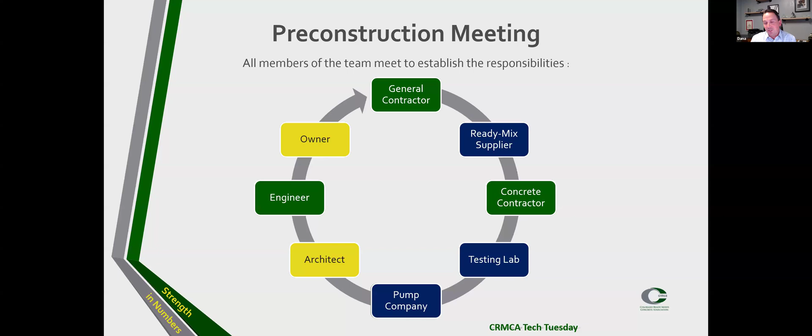So at the end of the day, are pre-construction meetings really all that important? Well, yeah, I think they establish clear communication. It's easy to say we communicate, but not understand whether those in the room or other people actually communicate. So if you don't sit down and have a dialogue, things get missed.

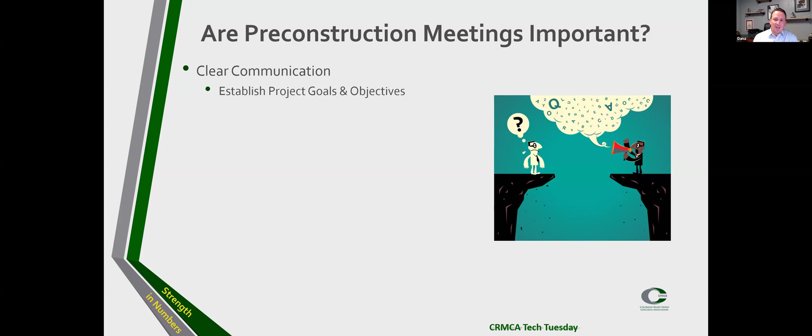You say things, you talk about things, and you've just assumed other people are on the same page as you. When you sit in a room like this, you do a better job of getting your goals out, making sure everyone knows what the objectives are, so everybody's in lockstep. And of course, being proactive in your planning is helpful at pre-construction.

If you're not proactive, you end up being reactive and doing triage. At the end of the day, nobody wants to be in triage mode, but over the years, far more often that's what happens when you don't have these meetings, when everyone doesn't get to the table and talk about what's going on and what's involved.

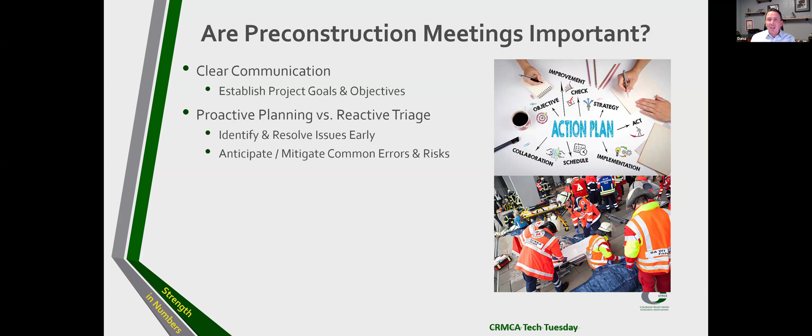And you end up in these triage moments where things are falling apart. It's not going the way it's supposed to go, and usually you have a bad pour or something bad going on. Then what do we end up doing? Everyone gets into the room to discuss what went wrong and why, when all of that could have been resolved had we done it early. We could have talked about what was going on, potential issues, and all that stuff. Shared experience is also a component of that.

Clarity in the chain of command is also important as a piece of this. Who has what roles, who has what responsibilities, is really important. Who rejects the truck, who makes decisions for adding water into a mix, who decides whether something has to move, or understands what things could be in the way of efficiently getting a pour done. All those kinds of things are really important.

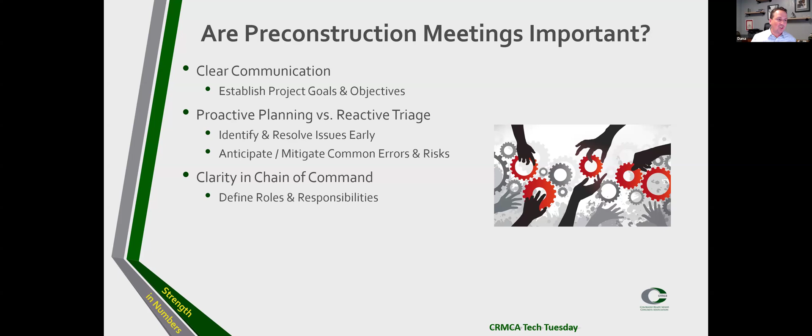When you wait until the day of the pour and people don't know who's in charge, obviously we all know what that creates. And then timelines, something as simple as that. Let's avoid the surprises and the delays. Let's make sure we're as efficient as possible in everything we do, because when you're efficient, you're far more profitable when everyone's efficient on the job site. And costs are always an issue for any job.

So we also foster collaboration and teamwork. That's really important. Anytime you get people to the table and have time to talk to each other, the side effect is collaboration and teamwork. It's just so much better when people come and sit around the table with each other.

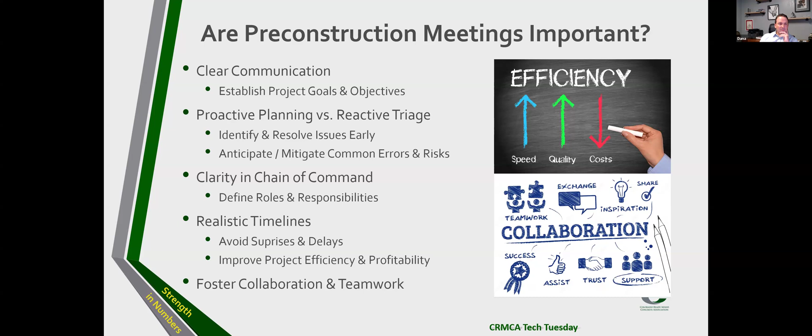So what are some agenda items? I kind of broke these up into categories of stuff that needs to be discussed. Agenda items at a pre-construction meeting would obviously include basic project information and schedule. That may not seem like a big deal, but really understanding a schedule from a ready-mix supplier standpoint or concrete contractor standpoint is really important.

The more you understand about where that schedule falls—you'd think that's naturally communicated, but it isn't. On the ready-mix side, it's far more often that you don't know the schedule than that you do, of when things get poured and what's going on. So having that information is important for how you plan and what other projects you take on.

Obviously, what kind of materials are you using, and what are the mixes? What does the pour schedule look like, and what does sequencing look like? Understanding that helps you see how weather days impact the overall schedule, if you sit down and have a discussion around pour scheduling and sequencing.

Site access is really an important discussion too—where do you come in, where do you leave, are there rules around that? Do we have limitations due to noise ordinances and things of that nature? All of that needs to come out and be discussed. How does that affect things?

Where's the concrete washout going to be? Is it sized properly? Does the location make sense? I've been on projects where we put the concrete washout in a location with only one-way street access in and out. So now you have one of the busiest places on a concrete pour—the washout, since every truck's got to come in and out of there—with a one-way road getting in and out of that location, which can really create bottlenecking and affect the pour in a whole different way.

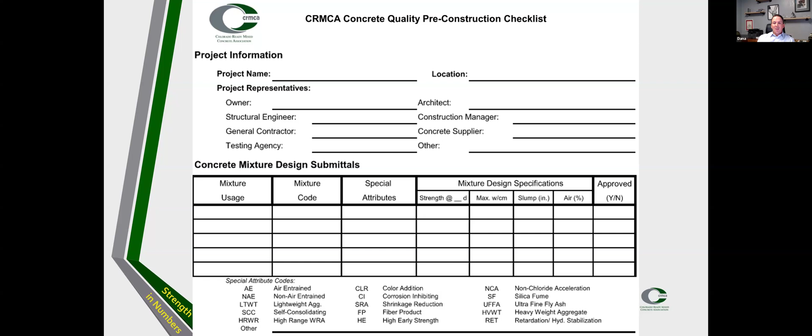If you go through this, you're going to minimize a lot of potential issues from a testing and compliance standpoint on the ready mix side of things. Obviously, the first page is very simple, just names the stakeholders and anything that's going on with any of the mixes that are in here. And then this is really important - if you don't do this on your job, I strongly encourage it, is do you ask, right?

Are you, the testing agency, giving me a technician that's certified? This is important. It doesn't mean someone can't get the test right, but it doesn't guarantee that they know how to do the test right either. So one doesn't behoove the other. But if I know the person's certified, then I at least have an understanding that that person should have the requisite skills to perform the test they're required to do. That's the same thing for all of us.

You wouldn't have someone placing concrete who didn't have knowledge of how to place it. So we need to make sure the person administering the tests understands what they're supposed to do. Unfortunately, in our industry, the concrete technician is often the lowest guy on the totem pole at the testing agency - usually their newest people, kind of a starter position. It's a crazy anomaly in our industry that this person testing probably one of the most expensive products on the entire job is typically one of the newest people in the industry working at the agency. So asking this question is really important.

And then, do we have access to all the things we need? Is the site - does the contractor have the ability for the testing agency to come back and pick up their cylinders? We see this far too often. Those cylinders have to be picked up within the first 48 hours. So when you have a pour on a Friday morning or afternoon, they can't be picked up till Saturday. But is the job site closed? Can they even come get those cylinders, or do they have to wait till Monday? If you have to wait till Monday, you've already made those cylinders invalid.

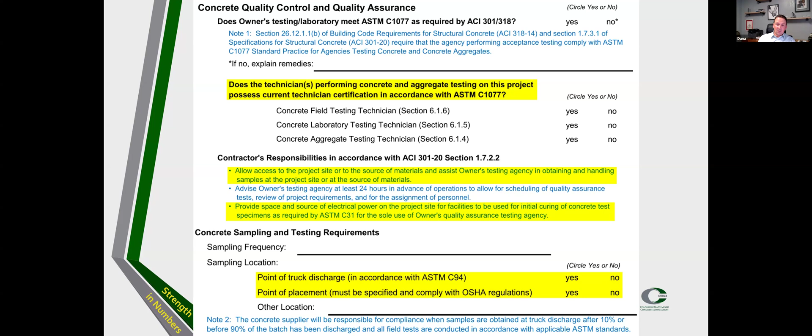It's not just, hey, if you flat stick out the boom it doesn't have any issues, or if it's an A-frame - I've heard all sorts of things over the years. The truth is there are a lot of factors that play into how the mix is affected inside the boom.

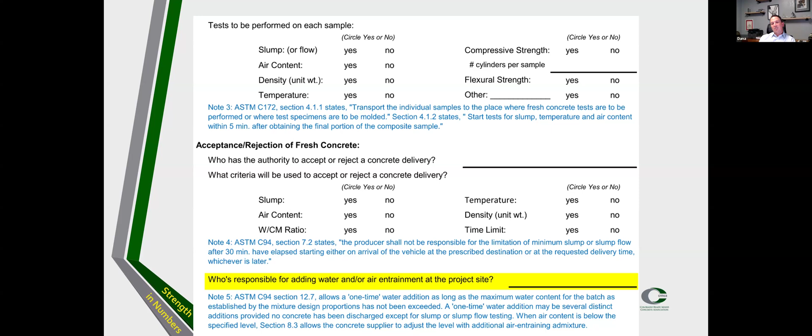There's lots of other things on here that clearly need to get discussed, but I'm going to point out some of the really critical things to me that this pre-construction checklist talks to. Are we getting a proper field test as part of this? That's really important. Remember, at the end of the day, you're looking for a third party, impartial person to test the concrete.

So that's what has to happen, and we want to make sure it happens right. So what does a good test look like? Well, from the basic standpoint, they've got to fill that slump cone in 3 separate lifts, making sure there's no voids.

One of the things I see all the time is that when you go to that slump cone, it comes at an angle like this. When you're rodding into that slump cone, the propensity is to rod out really easy, but not to rod backwards towards you, because you have to move your hands in a forward motion to get that rodding on the backside of the cone to stop there from being a void on the backside. And so when that happens, you get a shearing effect or a displaced center when the slump cone is pulled. Making sure the person understands that and is rodding it properly.

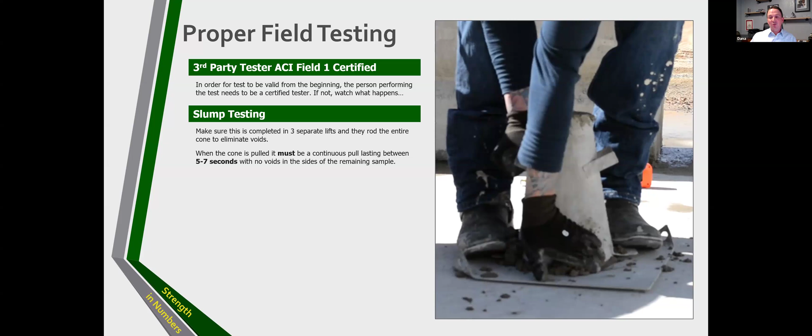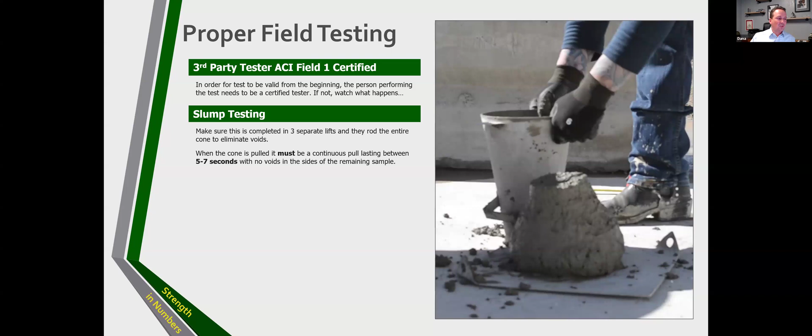And then do you get a good 5 to 7 second lift when he pulls the cone? Is there no break in the cone? Is it 1,000, 2, 1,000, 3, 1,000, 4, 1,000, 5, 1,000? A proper slump pull, to make sure that you have an accurate test coming out of there.

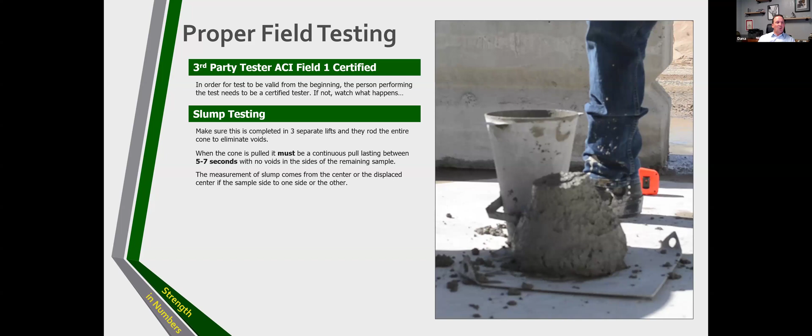And then obviously you measure from the displaced center - that sunken in little section right down in there, not off the edges. And if that whole thing shears, if it slides off or cuts, then it's a retest. You can't find the new displaced center. You have to scrap it and start over again and get a proper test.

And so if you see someone with giant globs of stuff on it, the test may not be as good as you hope. But again, just understanding what that looks like - are we making sure they've weighed their pot before they take their reading so they know how much they've got, because you have to subtract the pot from the weight. And then we're making sure the lid seals properly, with no air loss - that gauge shouldn't be moving right before you hit the release button on the side.

So do we see a stable gauge reading at the end of it, or is it still drifting? All that stuff indicates there's an improper seal around the bottom and that test needs to be rerun.

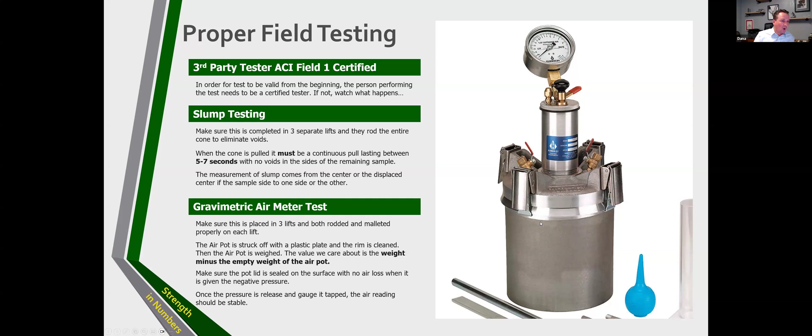And then all of that's to be said, at the end of the day guys, whatever the air test says should coincide with the unit weights as well. These are just some general rule air unit weight densities, but this is also affected by whether you have any pozzolans in your mix, or whether it's straight cement. So these numbers go up and down, but there are some general rules - these are kind of some of where you see air fall as far as unit weight.

The more air something has, the lighter it is in weight. So if someone tells you you're low on air, you've got 3% air in your concrete right now, and you ask what's the unit weight, and they say 33 pounds, they've lost their mind. Something's wrong in the pot or in the test that needs to be done, and we need to look at that. There needs to be a correlation between those two, and it becomes really important.

Understand, guys, air entrainment is the pink unicorn of the concrete industry. It's really hard to entrain air. There's lots of things that affect it. So have these dialogues in your pre-construction meeting about what happens on a day where we're struggling to get air right, because it's not about if it's going to happen, it's about when it's going to happen. Air is complicated, it's not simple, and there's all sorts of things that affect it.

Understand too, are we having a dialogue about our field test? Do we have a 90-minute rule, or are we really looking at the new ASTMs that say there is no 90-minute rule as long as you've had a discussion up front and you're using hydration stabilizer and things to extend your time. Have you had that discussion before you're in a situation where you're having to throw away trucks that may not have an issue?

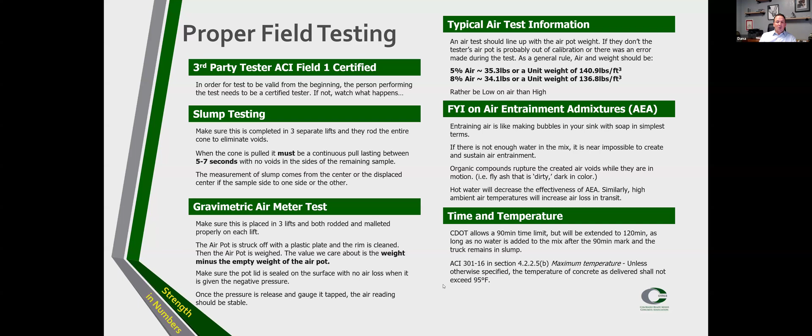So having these kinds of dialogues up front so that everybody's on the same page is really important. And then knowing what your max temp spec is and where that sits in time.

With that said, one of the great things that exists out here - and we're very blessed again in Colorado and CRMCA - is that CTAC was created. What is CTAC? Well, it's the Concrete Testing and Adherence Collaboration. This started a long time ago. I was very blessed to be a part of this when we initially had dialogues about the beginning development of it. But what is this really?

It's designed to help make sure that we have good, fair testing of the ready mix products that are going down, on both sides of the spectrum. It's meant to get all tides to rise. It's no different than when...

Your person comes in and they install rebar, and they get the rebar installation done - what happens? Well, the concrete contractor comes in and checks the rebar and validates it, right? And then behind them comes the inspector, they come in and check the rebar too. And if the general contractor's on top of their game, they're going to check that rebar too, just to make sure everyone's got a double check.

Well, it's the same kind of concept here. CTAC is developed so that there's an opportunity to make sure that the testing is going on, is being done correctly, and is being done according to the standards, so that we can rely on the results that come from it. Because if the testing is done inappropriately, then we don't know whether the test results are good or bad. So it's better to see this up front and know we potentially have an issue than to get to the back end and be in triage - everyone scrambling, trying to figure out why the test failed and why nothing is going the way we wanted it to.

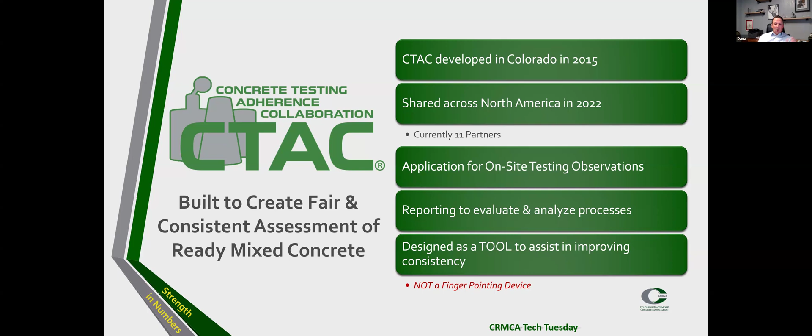It's been a giant hole that needed to be fixed. What it is, there's an application that allows anybody who's on site—the contractor, or anyone who's an observer who understands how the test is run properly—to observe and put down their observations of the test. Is it being run according to the protocols? And then that's allowed to be evaluated afterwards.

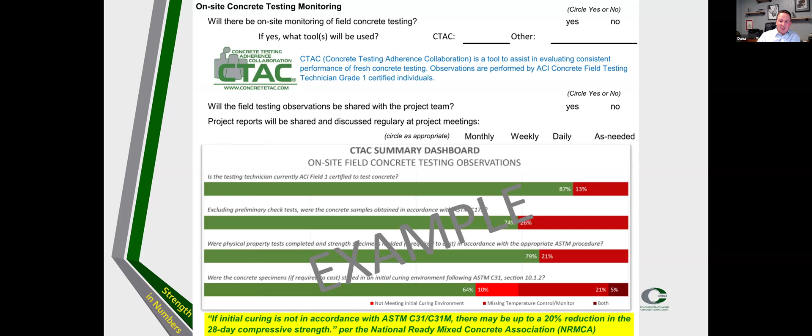With that said, I'll tell you now, NRMCA says there may be up to a 20% reduction in compressive strength if curing is not done appropriately. I'm going to show you some data from testing done by a whole lot of people in the CRMCA—technicians, testing companies, ready mix suppliers, and contractors—in a test fest. And I believe those numbers by the NRMCA are pretty conservative in reality. So what is the requirement?

The requirements are that after molding, immediately they have to be stored in a 60 to 80 degree environment, preventing moisture loss. Both of those things are critically important. Cylinders have to be held at 60 to 80 degrees, and moisture loss is just as important. Often it's not thought of as such, and we'll talk about that more as we go.

And then understand, when you have 6,000 PSI and greater, that window gets even smaller. So now from 60 to 80, you're down to 68 to 78. You've really got to control the temperature on high strength mixes to make sure they're done right.

And then how are they transported afterwards? That's just as important, right? You can't transport them until at least 8 hours after final set. Any earlier than that, and you fear creating fractures in the cylinders that will give you false positives or false negatives on the test.

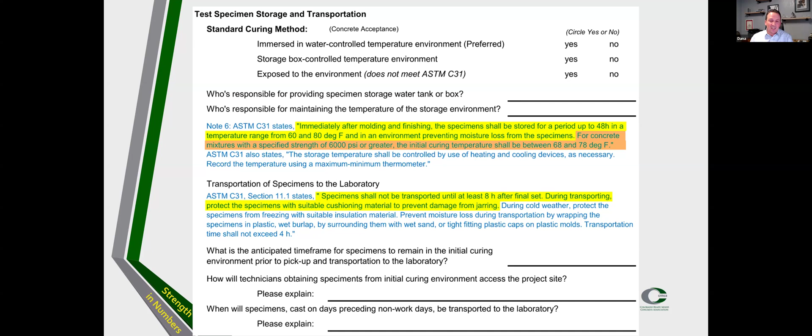I've seen this a lot of times—I walked onto a job site once and the guy was grabbing all his cylinders and throwing them across an 8-foot void where the foundation was, because he didn't want to carry them to the other side. He was throwing the cylinders like 9 feet across this chasm. I don't think that's what they were designed to do, and there's a good chance those cylinders get compromised. So it's important that we have these dialogues up front about what the expectation is and how the cylinders get treated along the way.

So what does proper field testing look like? Here's exactly what we talked about: you need a controlled, temperature-controlled environment at 60 to 80 degrees. You need to prevent moisture loss, and you need that high-low thermometer. Otherwise, you can't prove whether or not this happened, so we don't know whether the cylinders are compromised or not.

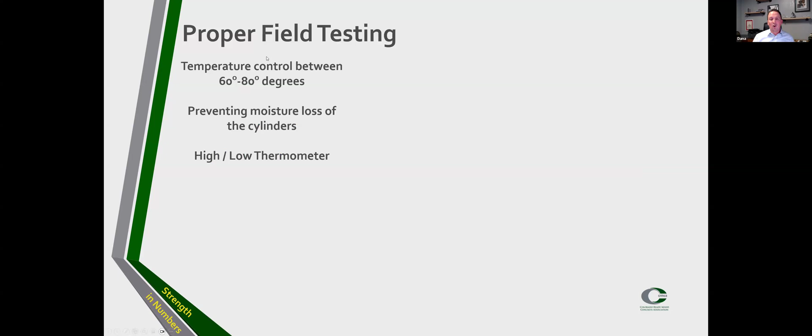So let's take a look here. What do you think? Is this a proper cure box?

Well, let's point out a couple things. One, there's at least a high-low thermometer in here, so that's good news—at least we can measure whether it's working. For those who can't see this, there are a couple of incandescent light bulbs in here meant to provide heat to the cylinders. I'm not so sure that works really well. Although it's providing heat, these cylinders here are probably getting a lot more heat than the ones way over here.

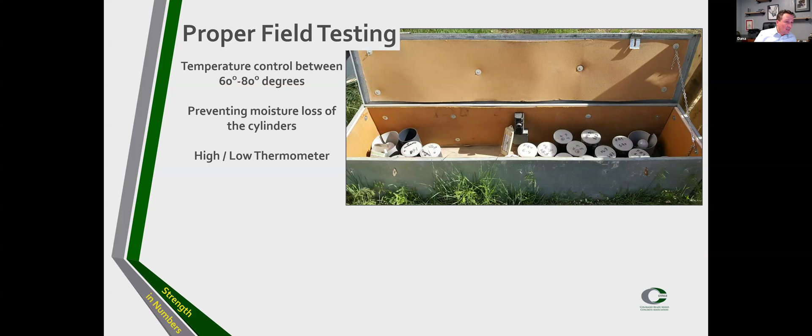So you may see some differences in your cylinders here. This isn't really an insulated box, obviously. It's got some cardboard and some plywood on the sides meant to kind of hold in the heat. It's better than nothing, but I wouldn't say this is a great cure box.

Well, here's what we see a lot. Here's the cooler. Hey, the cooler can work, I've seen it work. In the summer, this cooler really needs to be filled with water, and not just partially filled, but all the way filled. Why is that important? Because if you don't fill it all the way, you fear cold jointing, and I'll show you more about that in a second. In the wintertime, closing this up might be a problem too without any water in it.

Because now it's 60 to 80 degrees, guys. You close that thing, and what's a cooler meant to do? It's meant to keep things cold and keep things hot. So that cylinder is creating heat. If this thing's packed full of cylinders, that thing's probably going to get to 110, 115 degrees now. It's not going to regulate that temperature. So we've got to think about that. That's why a high-low thermometer is really important here.

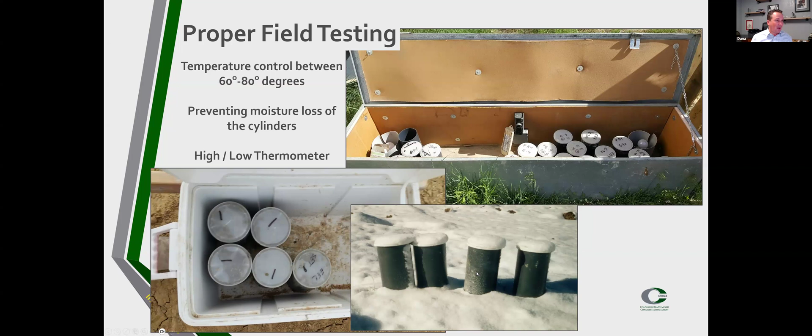What do you think about these little soldiers? Think they got a good chance of being at 60 to 80 degrees? I doubt it. I always talk about cylinders and say you got to think of them like little kids, right? The slab is like the parent, it's got all this heat and mass. Would you put your kids out at night to go through a cold evening, or would you rather put yourself out in that cold evening to survive till morning? Probably you're going to do yourself. But we do this all the time. We put these little cylinders out in the cold and expect them to somehow make it to the other side, and they don't often do so.

And then the wonderful Homer bucket. We've seen this lots of times. Look, this isn't all bad, I'm not going to say it's fantastic or horrible. It's definitely not fantastic, but if this bucket's got water in it, then okay, it's not bad. But the problem is this bucket may have water in it, and then these top cylinders sit outside. Well, guess what happens when this happens? Even if this bucket was to be full of water all the way to the top, these cylinders that are sticking out, these are going to cold joint.

What do I mean by cold joint? It means that the bottom is going to set at a different rate than the top. So now the cylinder physically creates a fissure in itself. So when you go to do a compressive strength test on this thing, and I go to squeeze down on it, there's a natural break already in that cylinder that's now going to crush, and it's going to give me a false test result.

You've often seen this in this kind of situation. If you go back and look at some of your test results and you see, maybe you have a 4,500 PSI mix and you have 5,000 and 5,000, and you've got this one cylinder that's 3,000. And you're like, well, what the heck happened? Well, that may be that lonely little cylinder that was sitting outside the bucket. And now it's pulled your whole test result down and you failed, when the truth is that you didn't really fail in the first place.

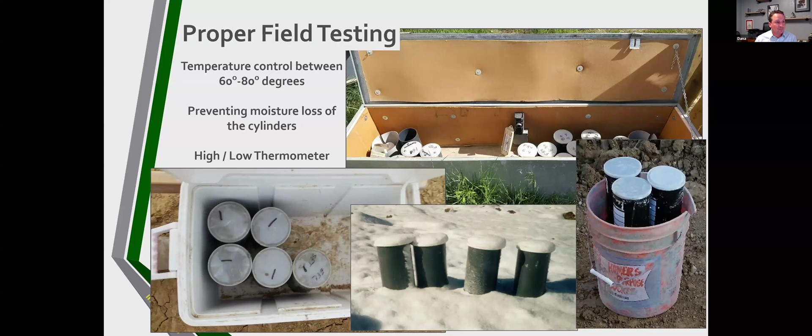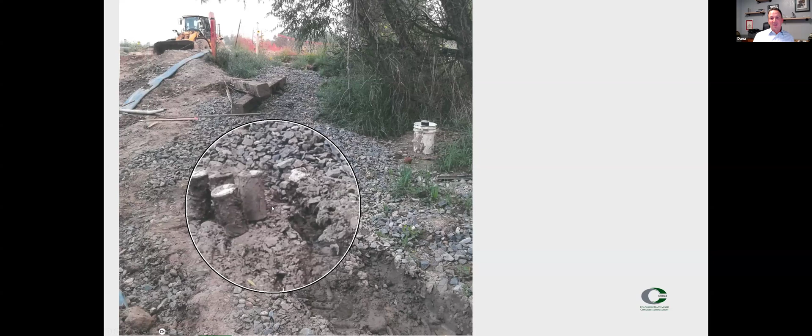And having a discussion about cylinder care is always important. What could possibly be wrong with this picture? Any guesses? We won't wait, but if you didn't notice, they're kind of masked in here. These little cylinders look like they may not have looked like they did when they first came through. Well, what might have happened here?

Well, look at our giant tracks. Here's our culprit right here. They ran right over the cylinders and just picked them up, set them back down and said, ah, they're good. This is not a good situation. Obviously, these cylinders are not cured properly, they've now been run over, they're probably suspect. I would tell you, knowing these cylinders and this whole story, this was an incident report. We shared it with the testing, with the contractor, and sure enough, the testing lab came back and these cylinders were low. Go figure.

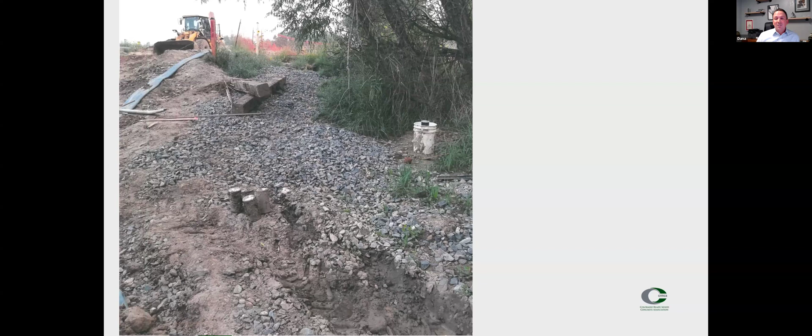But something else you may not have noticed, look back here. We got a second set of cylinders pushed off into the back.

And these guys are in the Homer bucket with no water, no anything on a hot summer day. They weren't necessarily any better off, right, hanging out back there. So getting proper curing, guys, is really, really important.

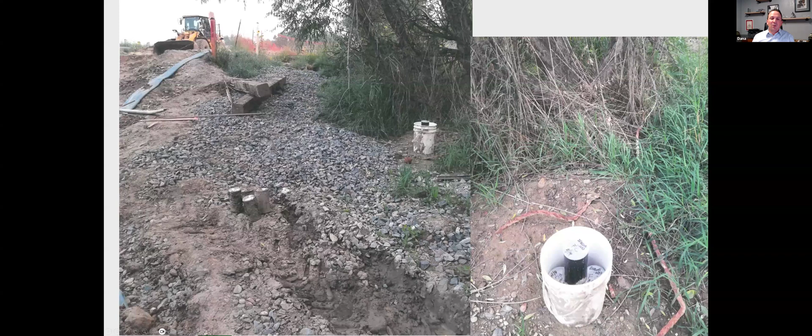And here's the data that I was talking about that should really help drive this home, right? CRMCA ran a test fest quite a while ago. We need to redo a new set of this with new data and more current mixes, but this data is still functionally the same for all of what concrete does, right?

And here's what we did. This was a cold weather day, so the day of casting got up to 57 degrees, the night got to 28 degrees, okay? Then here's what you had: some cylinders put in an insulated cooler with vermiculite. Vermiculite's a great sawdust-looking substance, it really deflects heat, does a really good job. Vermiculite in a cooler tends to work really well for keeping everything at a more controlled temperature. And then you had another set of cylinders that were just left outside in the ambient air.

Now look, it wasn't a real freezing cold night, 28 degrees, we're just below freezing on that, right? But look what happens, you guys, when you do this. The outside ambient air temp at 7 days was 1,750 versus 3,600 for the ones properly cured. At 28 days, look what happens: you're at 5,230 as opposed to 3,480. That is massive, that's a massive loss in strength. You had a 46% loss in overall strength because they weren't cured properly.

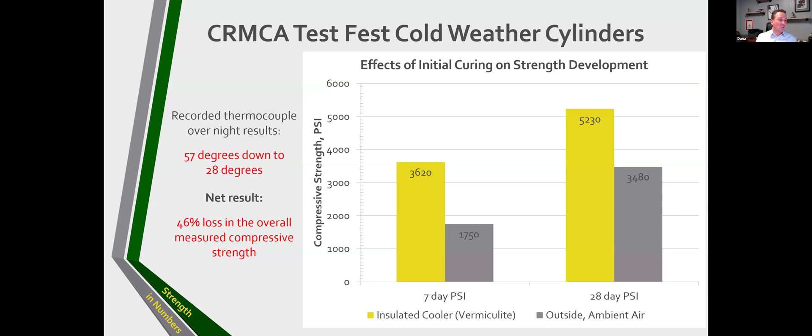And understand, this isn't just one sample, this is the average. You had a ready mix truck show up on this test fest, and about 15 to 20 testing agencies and ready mix suppliers all pulled samples themselves off the exact same truck. Then they all cured cylinders in these two ways, and this was the average of those cylinders. So this isn't like we just took this and had one bad break — this is a common thread across all these test results, okay?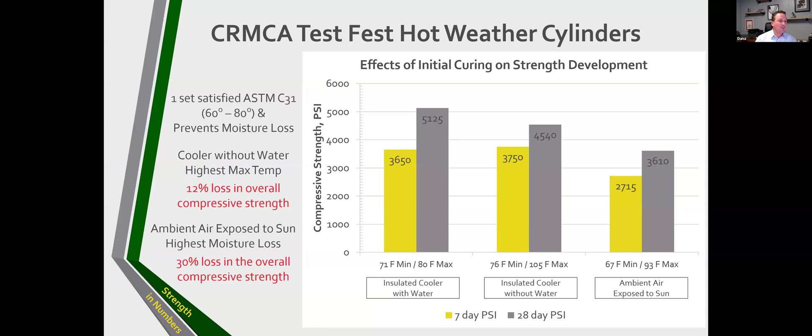If you're in a construction trailer and the AC's running and the heater's running, what are you doing? You're drying that air system out constantly, sucking moisture away from those cylinders. Those cylinders still need to be stored where they can retain their moisture, okay? Really important piece of this.

So just real quick, some specifications. I wanted you to know that everything we're sharing with you, both in the pre-con checklist I went through, lists the ACI or ASTM specifications these things are pulling from. The beauty of that sheet isn't just that it helps you know what to do and get around the pitfalls, but it lists the literal specifications you're quoting for. That's really important because now you know what leg you're standing on and where that came from.

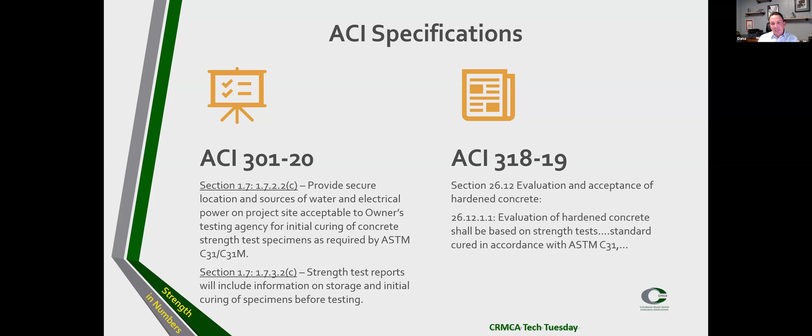I want to make sure you have a chance to see this. This presentation will be up, so I don't want to belabor you by reading to you - I know you can read. You can come back and check this out later, but this is a really important slide, that's why I wanted it here. JT and I really felt it was important for you to have this listed out, what the responsibilities of each of the parties are.

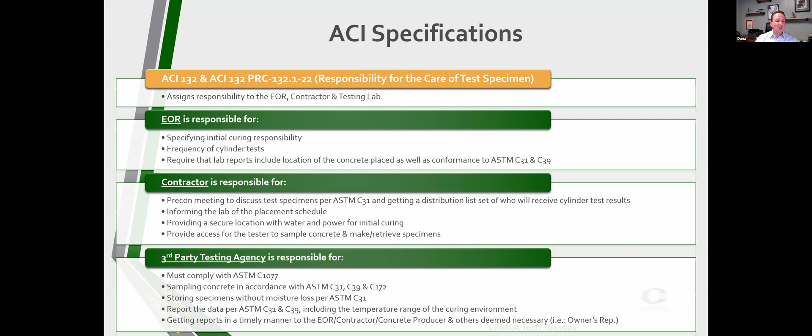Take that into your pre-construction meeting to make sure each person's fulfilling their responsibilities as to what they're required to do for test cylinders.

There's also the CRMCA pre-construction checklist out there. The NRMCA's is way larger - the CRMCA's distills it down to 4 pages, very simple, but really focused around cylinders and testing of the ready mix product itself, making sure you get a good test on the other side. The NRMCA pre-con checklist was created in conjunction with the ASCC, the American Society of Concrete Contractors, and it's 25 pages long - a great resource for the whole pre-construction meeting, and it goes far more into all the details.

This document - if you've not run a good pre-construction checklist and you don't know, and you were looking at those subjects on the tile board at the beginning - all of that list of green subjects is inside the NRMCA's pre-construction checklist. You can really go through that if you've never had a chance to do one before, and I strongly encourage you to use these.

It gets much more into detail around construction processes and sequencing, all your materials, schedules, traffic potential issues and cancellations. It's a really great resource, and it's much more safety focused in its nature - it talks about each of these elements and what potential safety issues could be around those things. So I strongly encourage you to take a look at that if you haven't seen it before.

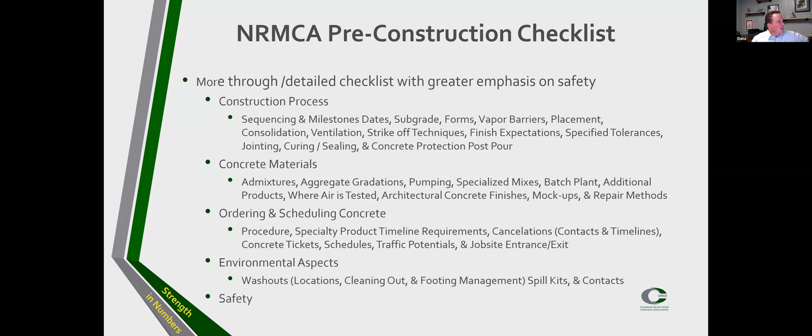So with that, I'd like to open it up to questions. If you've got any, I'm happy to answer. Do we have some questions out there? Just feel free to turn on your microphone and ask away. I don't see anything in the chat.

Well, good, that means it's pretty thorough, Dana. A couple things that stood out to me to recap here - all those boxes on your first couple slides, phenomenal. All those things come into play to make it successful, and many times we don't think about all those steps, but they're obviously very critical.

So last chance for questions. I see one chat - great presentation, Dana. That's not a question, that's a comment. Thank you for that.

Okay, one quick thing - Dana, JT, can you read that? What does 'full of water' mean? Do the cylinders need to be fully covered? Yes, absolutely, the cylinders need to be completely submerged in the water if you're going to water bathe them. Yes, absolutely, great question.